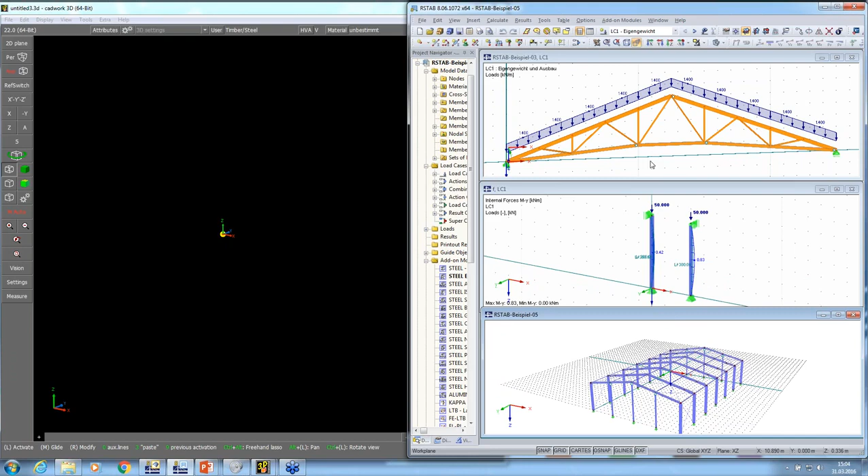So I will start and import something via the COM interface. I have here our framework program RSTAB, and I have three positions open there: there's a steel hall, a truss from wood, and some columns. When you go to cadwork and go to add files, you have a button, RSTAB.COM, that is only available if you have this additional license from us, and you can choose there, go RSTAB.COM, and select which project you want to import.

For this webinar today, we will mainly show the behavior of timber structures. I want to import this wooden truss. Press OK, and cadwork takes connection to RSTAB and imports it there. Here you can see that the properties of the profiles and the material properties are taken over, and you got all that information there. The next part is to import another truss that Christian Levers will model and show you how to model it in cadwork, and that's why I give the word to him right now.

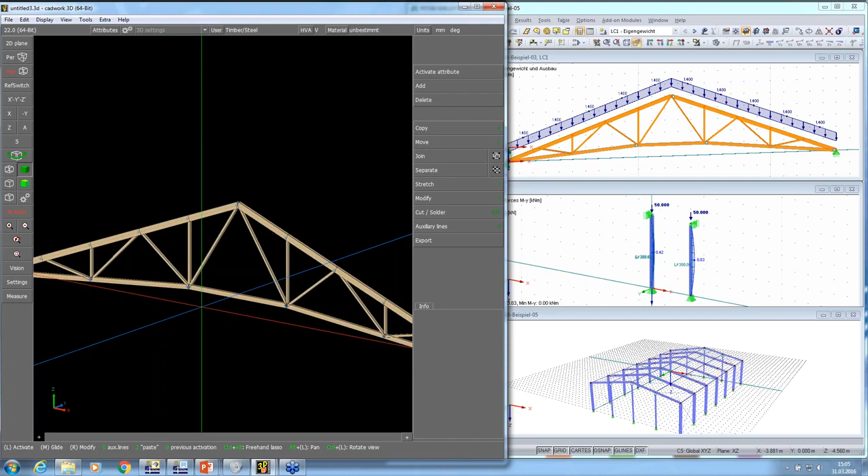So what we will do today is first create a truss, and for this truss I will use the new version Cadwork 23, which has been delivering since a week, and we will deliver this to every client in the next weeks.

So what I will use is not a single beam or a design, but a variant catalog file, or parametric catalog file, and this parametric catalog file includes now a straight truss.

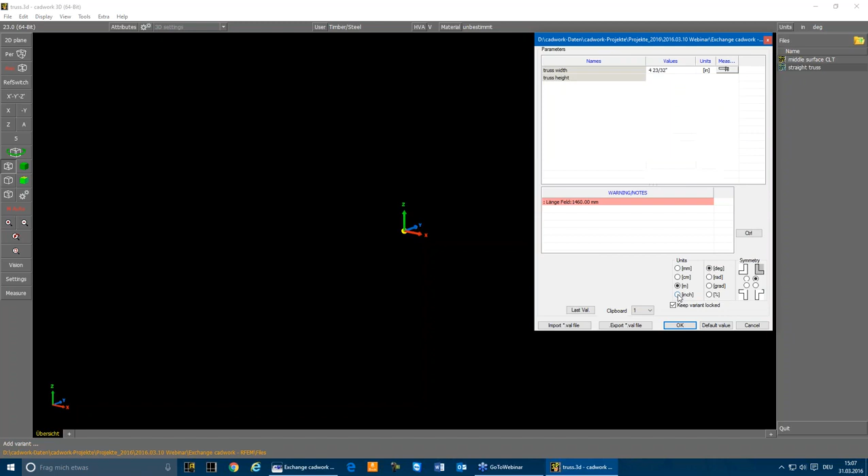You see this one now is in inch. It just doesn't matter, you can switch between the values between millimeters, centimeter, meter, and you can edit inside here. So that means a parametric element.

This is now a truss including all the parts of our beam. When I do a double click on it again, I'm back in the menu and I can change the values. For example, I change the truss width to 6 inch, the overall truss height to 5 feet, and so on.

So I just use different values for my truss, and for the girder let's choose a 10 inch and a 10 inch for the height of the top girder. The width of the side post should be 4 inch, and so on. So that means I can just define the elements.

I will choose a maximum field for the braces of 4 feet, and in this case for our calculation, I don't need this slotted plate, so I will put it to 0. Also the additional space, and also those parts here which will not be used.

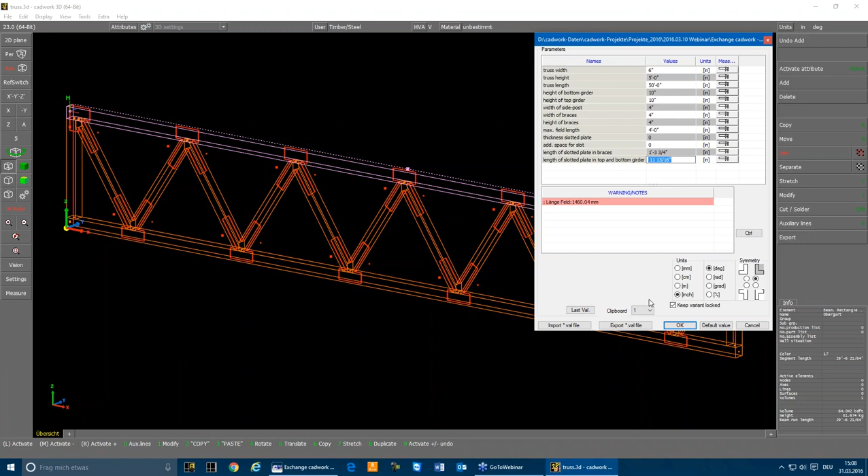So that means with the change of these values, I will be able to define an element like this, a truss like this. So you see it's a kind of parametric design.

So now we also have some information about material and so on. For example, this one now is done in glulam. There are some names inside and some values for the dimension. So you can define all this in the Cadwork variant.

But now, how to get this into RFEM for the calculation, we have several options. The first option is that I will activate all the beams.

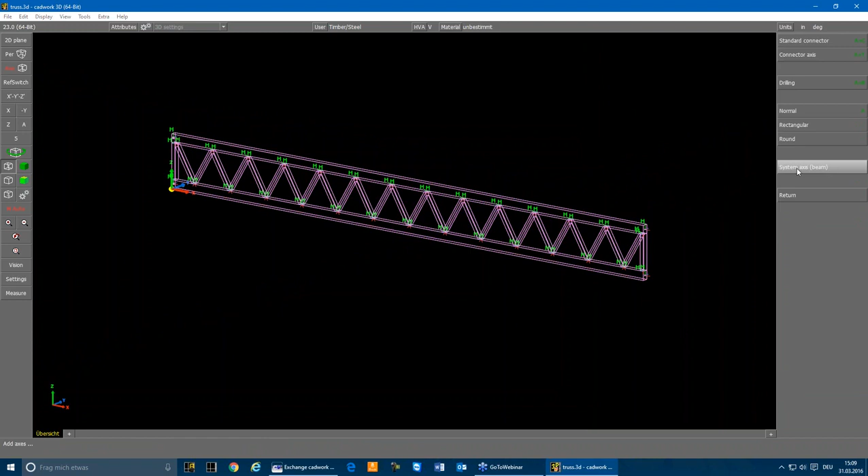Now we'll go to Add Axis and define the system axis for each beam. That means now in the center, gravity center of each beam, there is now an axis, but you see what's missing here is the eccentricities from this point to this point here.

So at this first model, I will just define, or change it, by either moving the axis to the right position using the shortcut command 5 for moving, or 7 for stretching, and I will define a new model which looks like this.

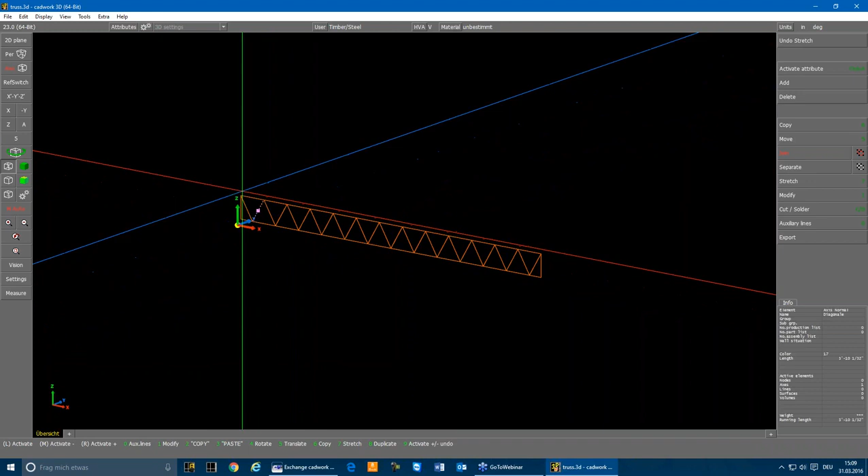So this is now just a quite simple way to define only the system axis, and we can export those axes by Export Files, DXF file, into a 3D DXF file.

I can choose the color, the layer by color, material, or name or group. I will choose it by name, and this one should be called truss.dxf.

So this is the first option to export a design or a structure from Cadwork. So now I will just show another option which is possible, and this is a very, very clever one.

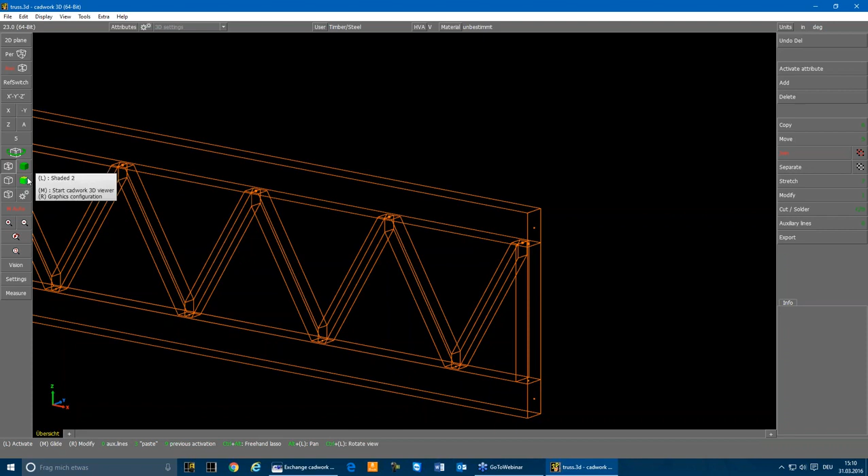This is available since version 23 for every Cadwork user. Here in our design we do have a connecting surface, a connecting surface from this part, so from the braces and the top and bottom girder.

So we do have a touching surface. We don't have to define anything on this touching surface, but what we can do is activate it.

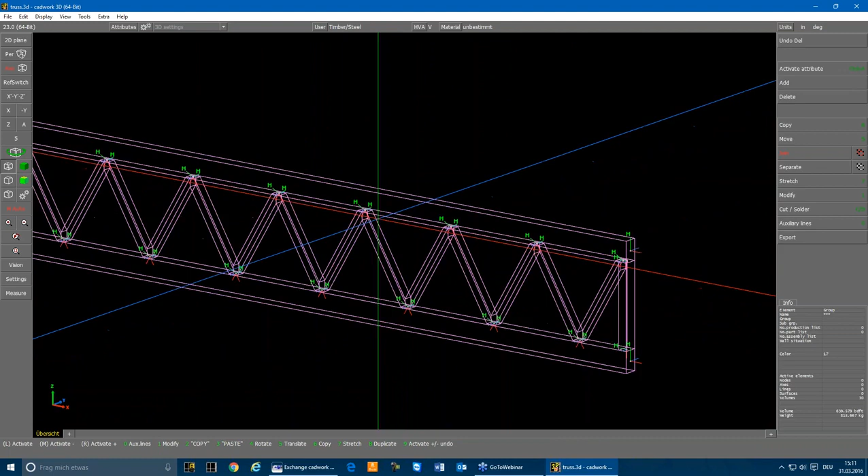And we can go to Export, Module, and just select the point Structural System. So then we have an internal analyzing tool, which gets an automatic connection between the braces and, in this case, the girder.

So that means according to the touching surface, we have this eccentricity filled with a beam or additional element. Then we can save this DSTV file, call it truss.stp, and that means now we have a step file which can be handled in the RFEM program, and Bastian will now show you how to do that.

Okay, thanks, Christian. I will actually split this presentation into two parts.

What I'm going to do now is import this truss beam via DXF and via .stp format, and the design with these trusses I will do with Eurocode 5 with the annex from United Kingdom, British Standard annex. In the second part we're going to do a CLT position, which is a bit more complex, and I will do the design with our pretty new American design modules for some parts.

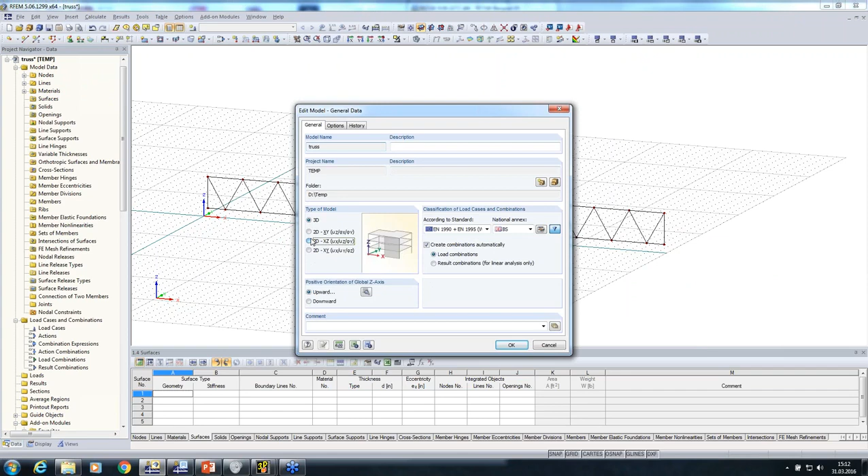Once I've imported it, I just make a plausibility check. I have here the size 50 feet, so that is all correct. As I'm in the XZ area, I'm able to change my model to 2D XZ just to make modeling a little bit easier and not have so many degrees I need to look for.

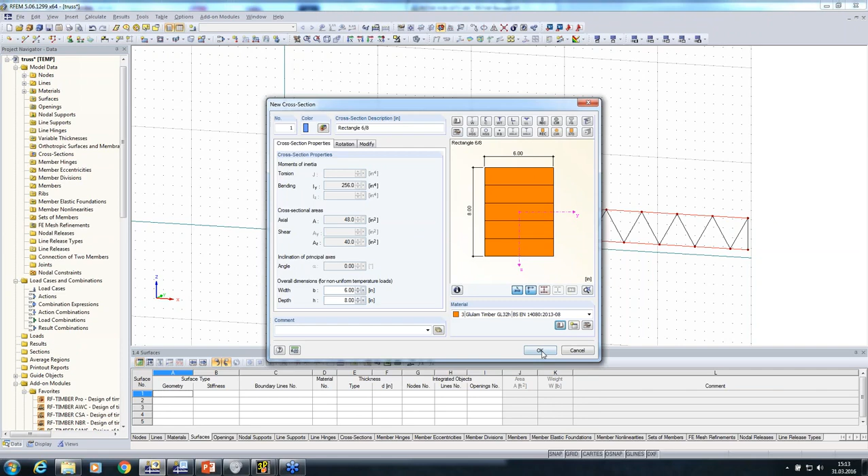Then I changed the top and the bottom girder into a profile. Let's say we could try something else with a rectangle, 6 by 8 inch, and as a material I would choose some glulam, let's say a pretty good material grade, GL32 for top and bottom girder. Okay, and then I have that created.

I will also create a set of members to make an easier load input later on. This is now a continuous beam, it's not cut in between the braces, which I need to do as well. So now it's done here.

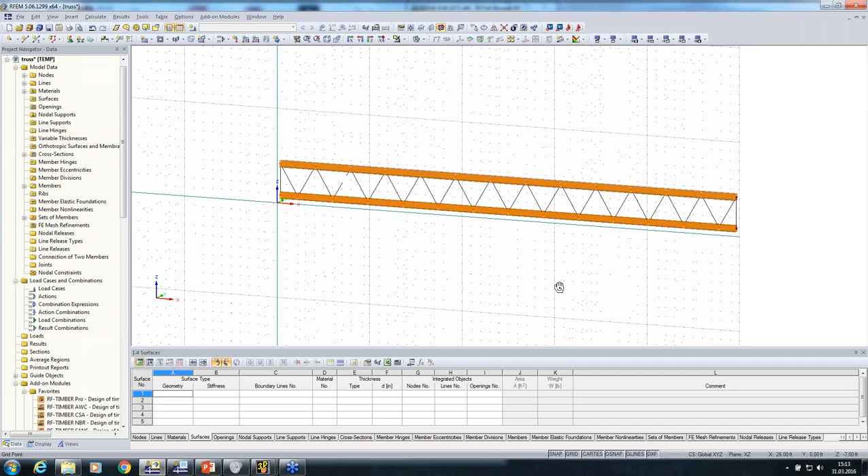And then I change the braces into a truss beam via the same way. There I would use a profile rectangle, let's say 5.5 by 5.5 inch, and maybe not such a high grade material, only GL28, just to have some difference. And make, as I said, a truss beam here, which is just nothing else than a beam with moment hinges on both ends.

Okay, and then this truss is created. Now I need to define some supports, so one that's not movable in all directions, and here I would create a support movable in the X direction.

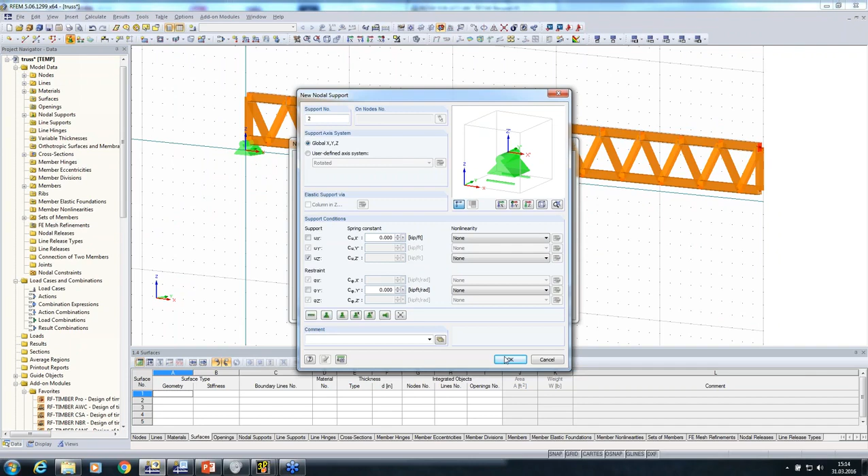As a load, I would define self-weight with characteristic value, and on top I would define some setup of minus 0.5 kilopound per foot, one more time for the set of member.

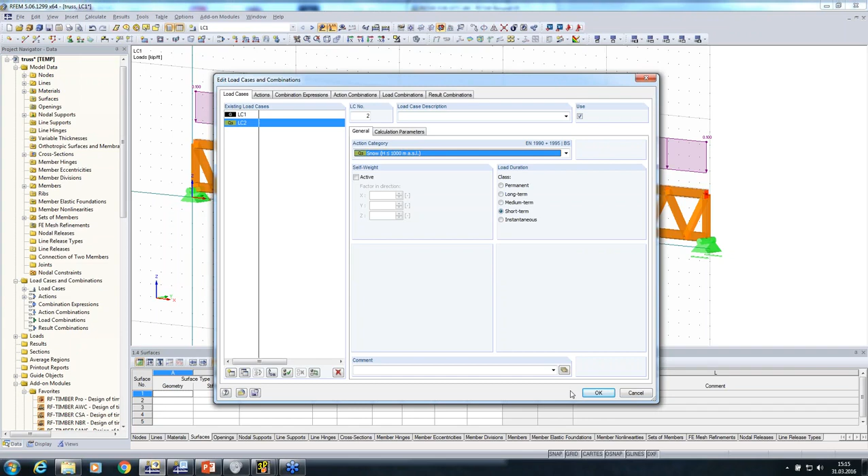Okay, and a second load case for the snow, just to get some combination. You see now that I took the automatic combination with Eurocode 5, I already have a classification of the loads and don't need to take care about this anymore. As snow load, I would use minus 0.22 kilopound per foot. So the loading is ready, and I would take a look at the combination.

As an action, I would define ultimate limit state according to first order theory. I'm not taking care about serviceability right now, but this is also possible here.

In the design process, I will just show the modules and not get too deep into their behavior. There are special webinars for each module we are showing today - there's a webinar for Timber Pro, one for Laminate, and for joints as well. That will be touched there much more detailed than I could do it now.

Here we have design modules for timber beams for Eurocode and Switzerland with, I would say, nearly all national annexes I can estimate. American standard we have, Canadian standard, South Africa, and Brazil we have as well.

Okay, so in the first step I would do the beam design with Timber Pro. Choose there also the national annex from British standard, ultimate limit state. As I said, I don't take care about serviceability and fire resistance. I will say a word about cross-sectional area reduction on the bigger module in the American standard design module later on.

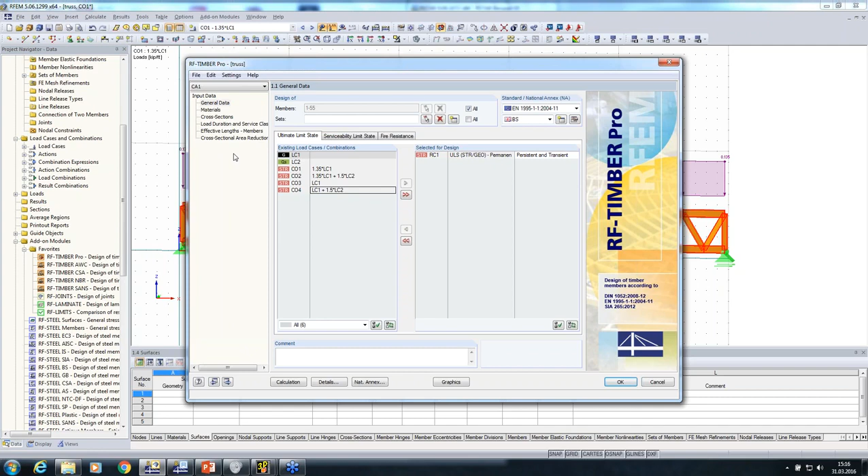I could uncheck the stability design as lateral torsional buckling - I'm not interested right now, and also not buckling out of the narrow side.

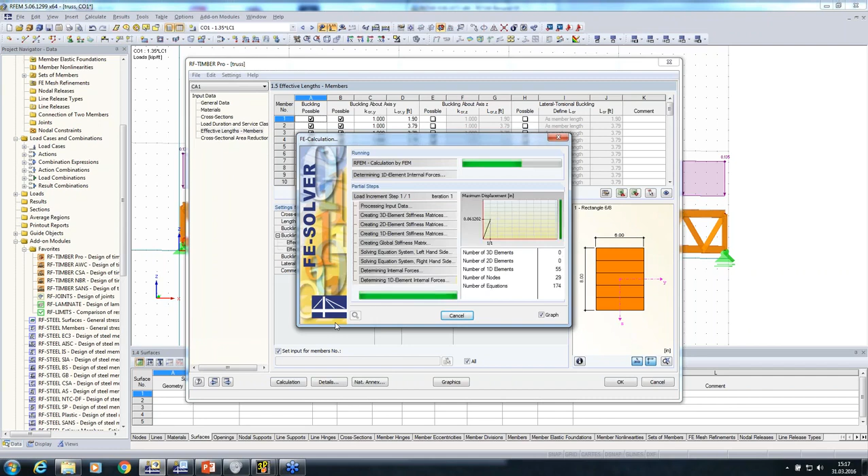Calculate the truss and we'll receive a loading. So it's pretty low loaded with 40%. That's pretty low, but we must also consider the connections in between, which will narrow the profile one more time. So to have a loading of 60-70% is pretty common for this kind of truss.

And now I would go to joints, but I forgot one thing - joints is able to create stiffnesses itself, and therefore I need to change that truss here, the beams, one more time from truss to beam, and make a hinge, a moment hinge, on the end.

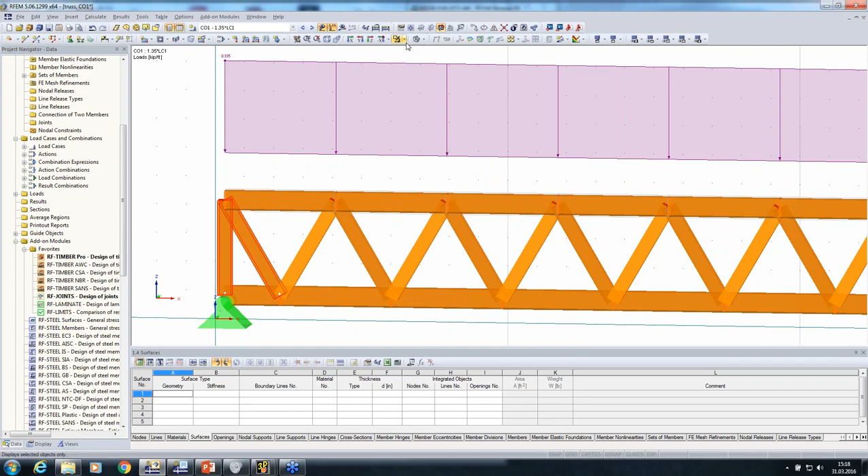Just to show you the inner forces, because that is pretty impressive for this structure. If you look at the structure right now, it's like we all learned in school. We have the moment where you have some kind of support here, the negative moment, and on the end the moment is everywhere zero.

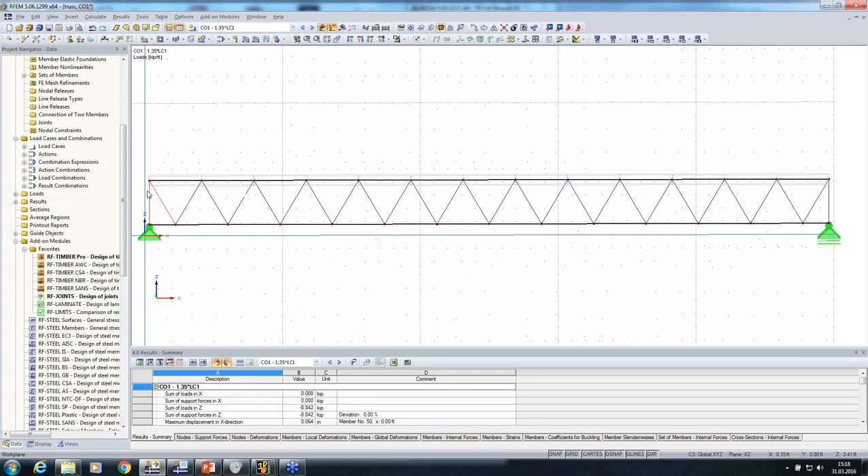And now when you change that, regarding some stiffness that is assigned here due to the connection, I would beam and moment hinge and go to the module joints. So the module joints is also split into two modules, or there's a whole bunch of modules inside.

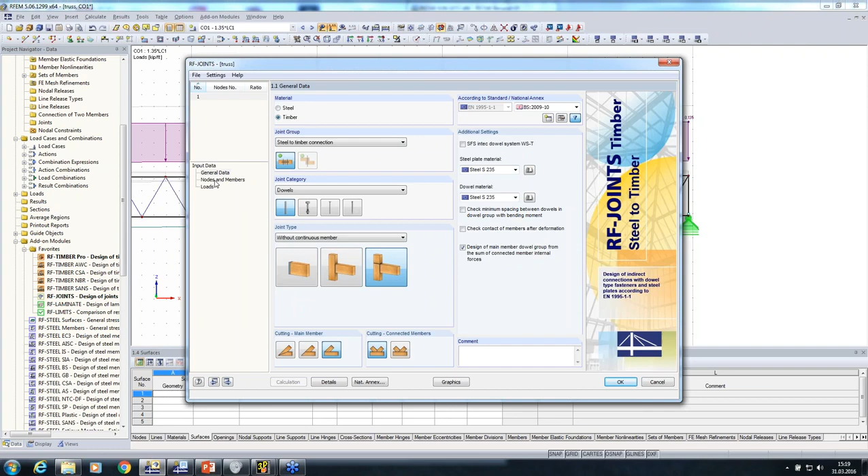We are today only looking at timber, but it's also possible to design steel connections in there. You have also a lot of annexes. I would just design the end with this cutting, and use this node and this node.

So it already recognized, okay, there's some connection possible, and I can take that here. The main member I want to have on top right now. That's what I'm changing, so I change that to main member and this to connected. Yes, yes. So then the connection is set.

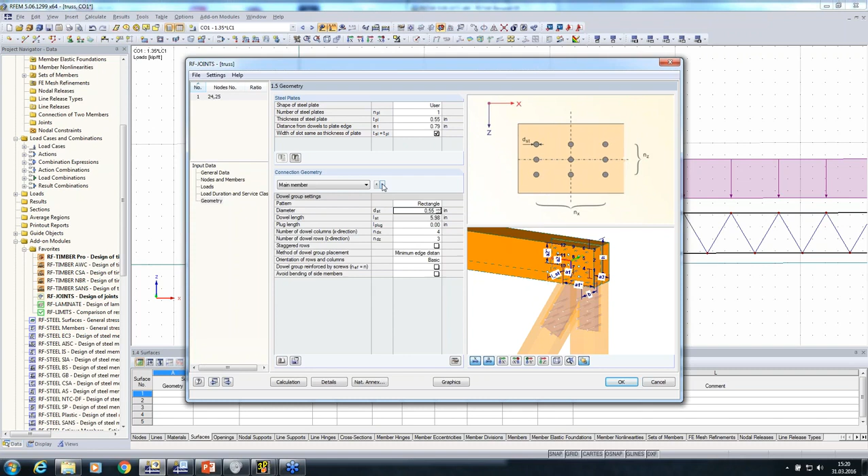I just define some load to it and look for the geometry. I will not change too much here, just to have some more common thickness of the steel plate. And I could change that to 0.55 and make pretty much dowels here, as I have a very high tension force here that I need to assign to it.

At 0.55, I put 12 dowels in longitudinal direction on this side and also 12 on the other, at 0.55. Okay, that's a lot of dowels right now. In practice it is probably more common to use a user-defined distance here and to make a bigger surface you can attach with the dowels. But as I said, for now, that should be enough.

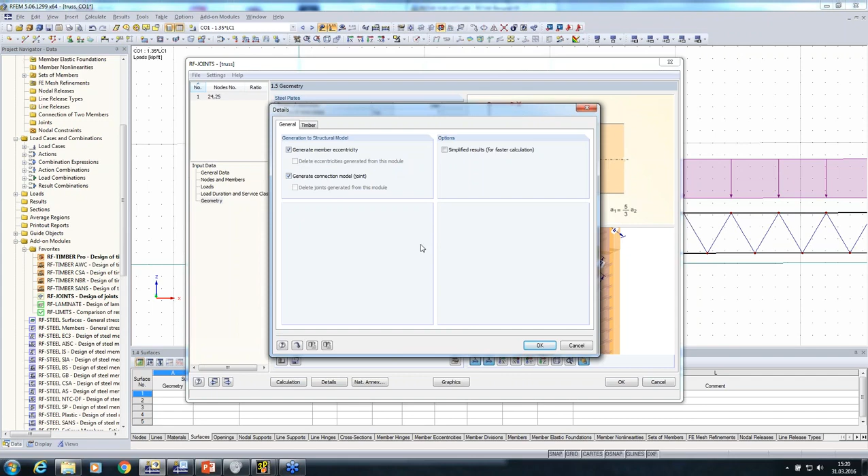Now I can tell the module to export the stiffness to RFEM and make a design with an iterative design process by changing the stiffness outside and calculating the forces again inside. So I got some connection problems here, some geometrical restrictions, but the loading of the dowels itself is not so high. That's all okay, but what it did during the calculation is just what I said.

It made its own eccentricity, changed it here, and if you look at the inner forces right now, you see I have now also some negative moment here at the end where it was zero before, and that's because of the more stiffness I assign with the dowels.

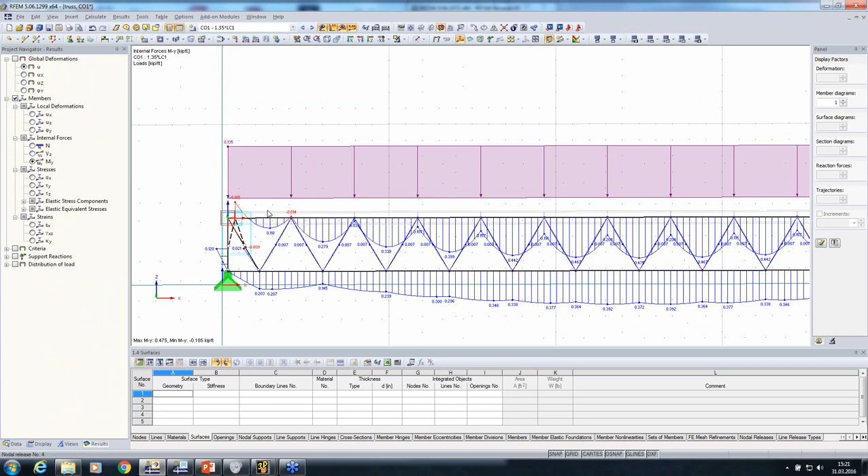Okay, that should be it, and now I'm importing the geometry from Christian via the .stp interface that already contains the eccentricity, so I don't need to take care about that there anymore.

When you do the .stp import, you have an option here to use a conversion file for materials and cross sections. Very useful with any other program you are working with, because you can combine the materials and names from the other software to ours. Every profile and material has a little bit different name in another software, just because a CAD program must look for other things than we must look at in the static design.

So right here I changed already a few things. What we could try out is just delete the glulam that Christian defined for the truss, and then see that it's not working, and then change it afterwards. So I save it.

Go inside here and choose that truss from Christian. I would not do the automatic combination right now. I think you've seen that all. And when I import it now, you see, okay, it's blue and the material is not found, as I deleted it before. So we're going to do that one more time.

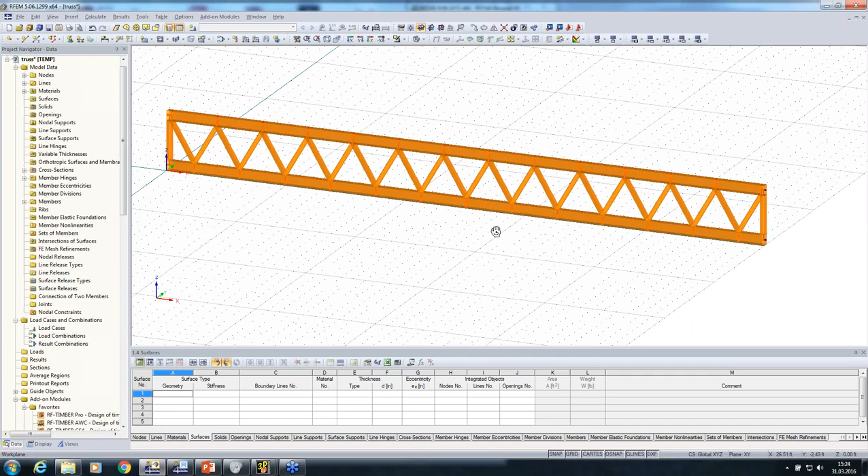Okay, save. And now if I do it, it should be imported with the material properties. And you see, okay, that's working now, the material is found. And now if you look for the model, you see it's also in 3D, so that's what I can change directly right now. Make it a 2D position and work with it in this area.

One thing I need to say, this eccentricity here, the moment hinge should be downwards, it's upwards. Change it via right click and say member, reverse member orientation.

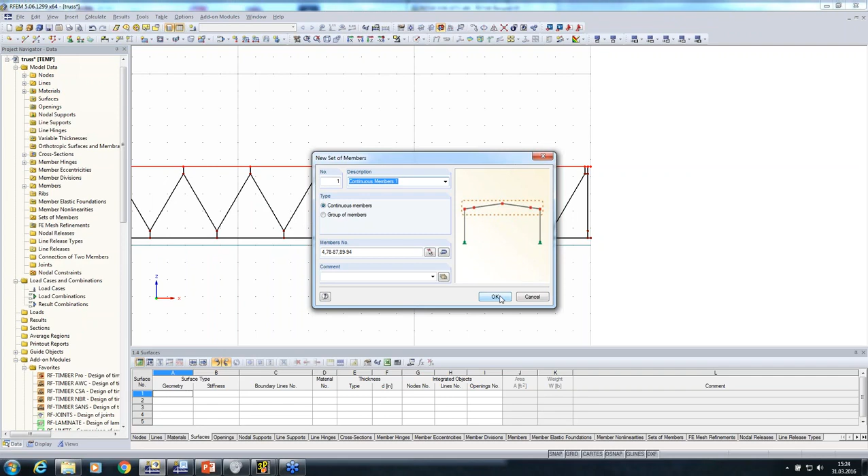Just to give you an estimation of the changes of the inner forces, I load it, create also a set of member and a support similar to the one I just defined on the other structure. On the right side I make it movable in X direction. And now I load it - set of member, same load as before.

And when you calculate it now, that's just what I wanted to show you, that you have then also negative - or it's not negative because the member orientation is changed - but you got a positive moment here now on the top, which is pretty similar to the one we just had.

Okay, that will be the first part. Now Christian is going to show you how to model a more complex building, and I'm going to import it afterwards and design it according to American standard.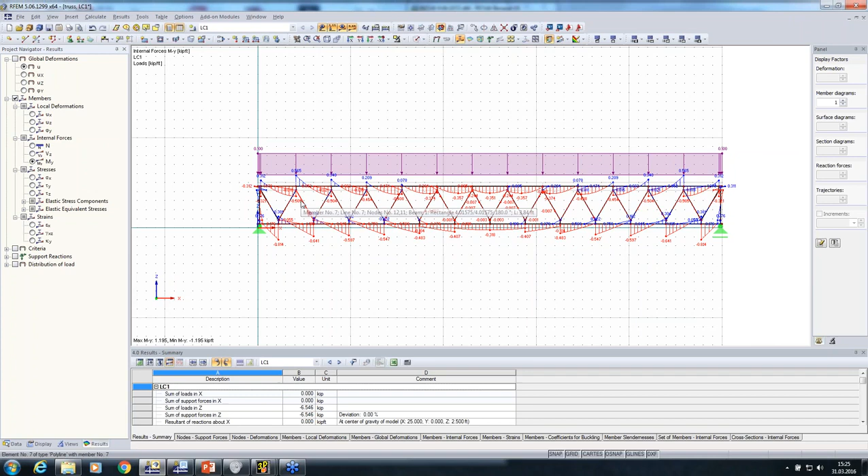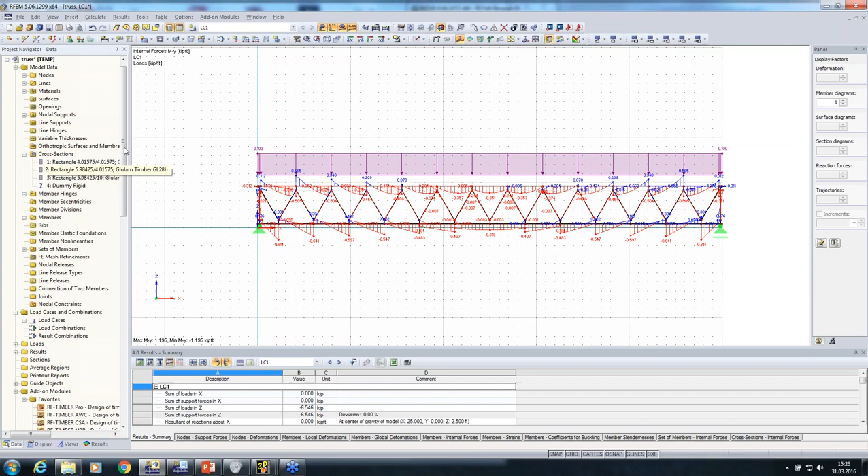Bastian, do you want to show to import this one into cadwork again? Yes, thanks, I forgot that. Very good, let's assume we need to change something. I forgot it on Tuesday as well on the German webinar. Okay, very good, so let's say we change the - what do we change? We change the braces to maybe also a more common value, let's say 5 by 5.

Say okay, and now that we need to increase the size, we export it to cadwork via this button. There's also a conversion table which works the same way as I just told, and then I call it 1, 2, 3.

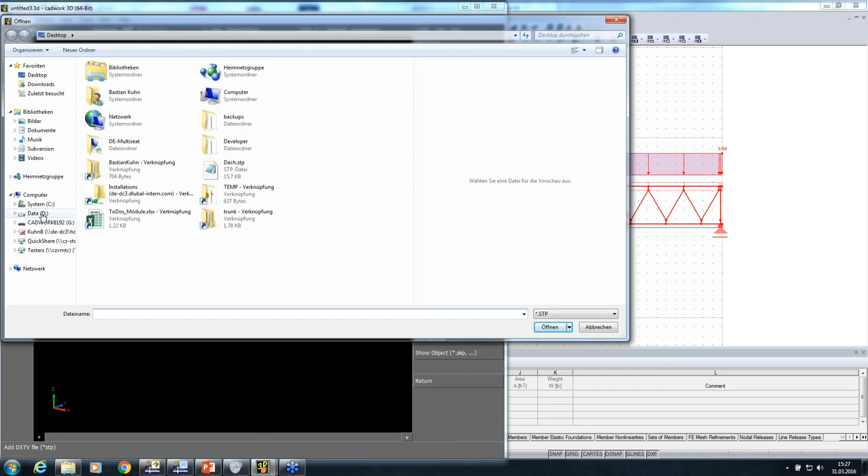Say okay, and then when I go inside cadwork, add files, DSTV - where was it? Webinar, cadwork, today, 1, 2, 3.

So, if you look right now, you got the properties of the beam assigned, and also the size of the profiles is changed, and also the material properties are imported to cadwork.

So the big advantage - maybe one thing, go to modify, then we could see the material. So you see that now with this conversion table, we got the right material back into cadwork. That's correct, yeah. I did not change it to inch, so, but in cadwork - no, that's not a problem, yeah, it's just a thing in units. So it's everything okay. Exactly, yeah.

Okay, thanks. So I give the word to Christian. Okay, so from my side, now I will do a little bigger model that is now a complete house containing 3 different parts.

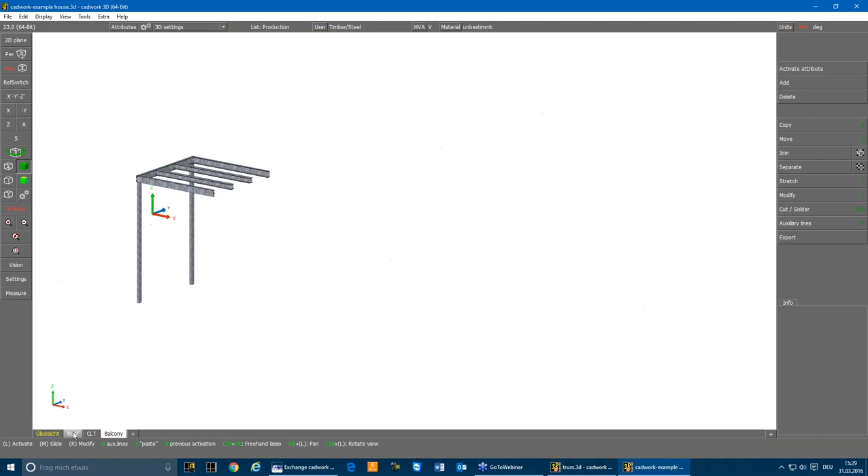So the one is the roof. Then we do have the CLT elements for walls and floors. And in this case, a steel-shaped balcony. We will just define 3 different outputs here. So first of all, we will take a look at the roof.

Also in the roof we have our beams, and we do have a hard and soft cut here with the purlins and the rafter. That means we do have a connection surface which is here horizontally and here vertically, so it means we have 2 connecting points. This will be one point we have to look out for later on if we define that.

So for the support, we can either do this now later on in RFEM, but also we can do this already in cadwork. So as Bastian imported the DSTV file into cadwork, this was including also some nodes, and the node information is also including the support information. So in this case here, I will just use the catalog file I prepared - this is support, not movable in this case. And you see it looks like this. The only important thing is actually only the node on the top, this one.

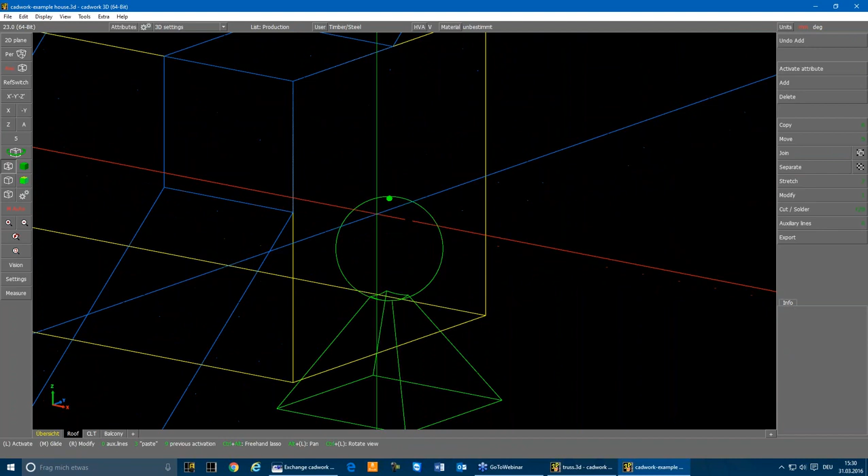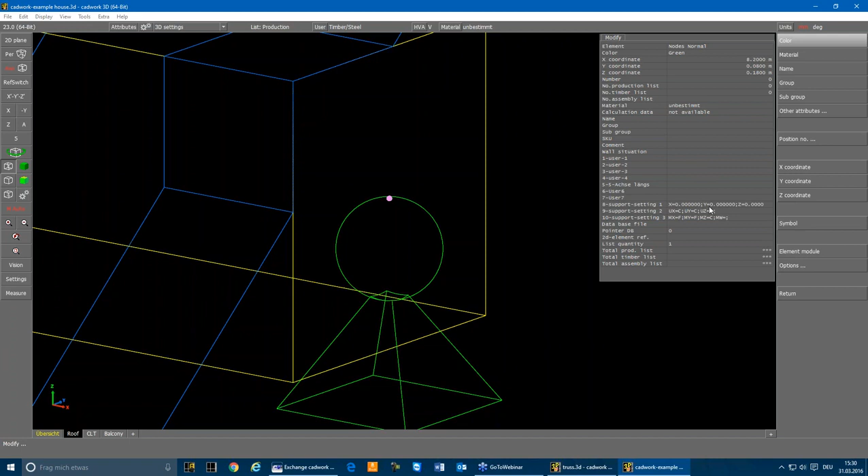When I go to modify, you see that this is a normal node, but we do have the support information in user 8, 9, and 10. So this is just what is possible in cadwork, that you define the support settings for RStab or RFEM directly in here. That means this one here is just for visibility reasons - the important thing is the node.

So we can move this, for example, in x-axis to that point with 6 for copy in x-axis. We can copy it to this point as well, or we can copy it either by 12 times in x-axis to that point. So it means that here we can easily define all the supports.

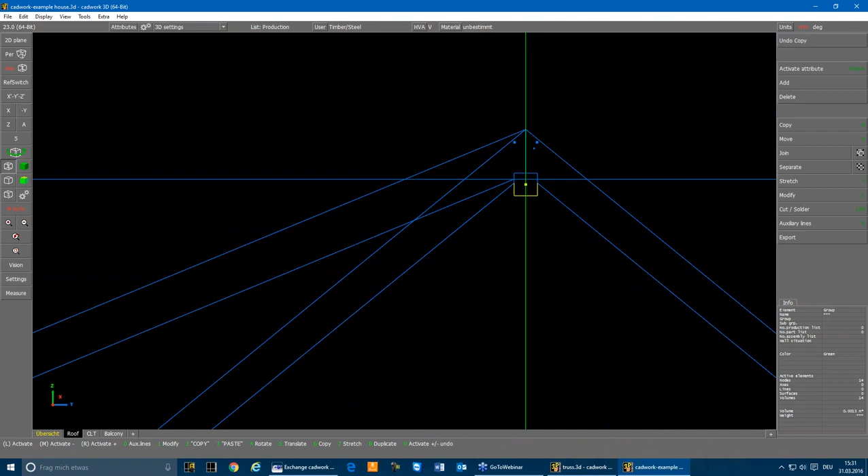Also, we can copy this one, all of them, by 6 for copy, S for symmetry in y-axis through the center of the ridge point, and we have it on that side as well. So that means it's very easy to handle all the supports, and it will take you less work than later on in RFEM to define it.

So now we will put it from here to here to have a support in the ridge beam as well. Copy it to the other side to the midpoint of this ridge beam, and we do that with all the supports we need. By switching off the auxiliary elements, we now have a model which looks like this, including the rafter with, for example, material spruce, and the purlins and posts with the material glulam as well, like we had before.

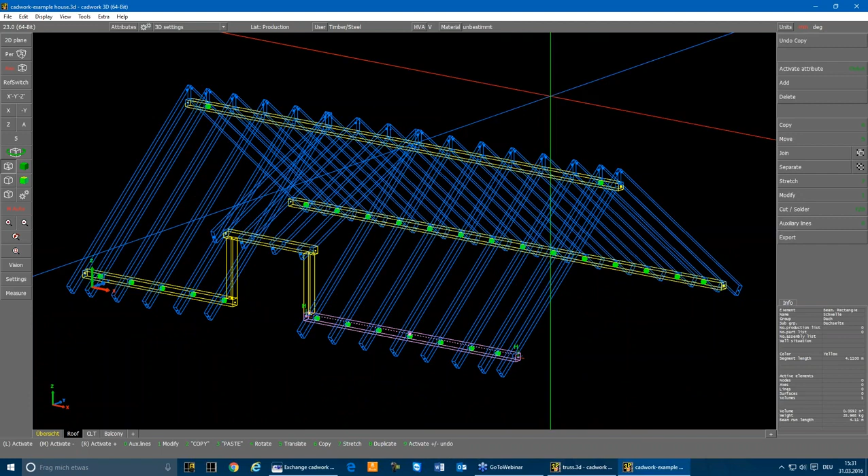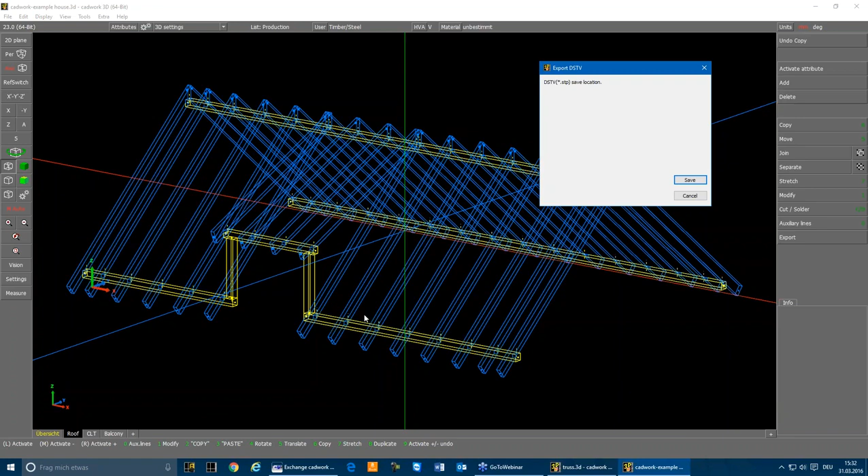So when we now activate all the parts and go to export module structural system, the elements are defined, and the system finds that there are 2 touching surfaces at one point, the horizontal and vertical one, and now we have to choose which one is preferred. We will take the vertical connection as preferred, and then on each touching point, we have this additional element, the eccentricity here from the purlin to the rafter.

So we will save this now as a roof, and it will be saved as a step file. So this was part 1.

Part 2 will be the CLT parts, and the problem with CLT parts is that we can't work like a beam on this one. We need an additional element for the laminated walls and the floors, and this is a middle surface we should work with.

To define this, we just created a small variant tool again, which is in Add, Variants, current folder in this case. We call this one Middle Surface CLT. Anybody who wants this file, just write a mail to info@cadwork.de or to their connected cadwork reseller, and we will send the variant file to everybody.

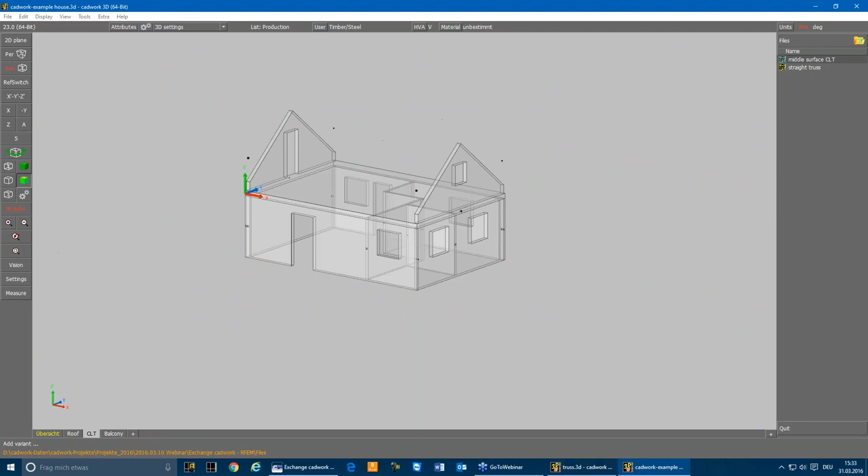So this is just a small variant that, when I define all the parts, creates surfaces right in the middle of each element, using Control A and M. So you see we now have a rough model of these parts. We can go to cut and, for example, cut them to our surfaces, or we can just stretch all the surfaces to the right size, stretching it in the Z-axis to this point, for example. We can stretch the corner connections, stretch it to this point, and so on.

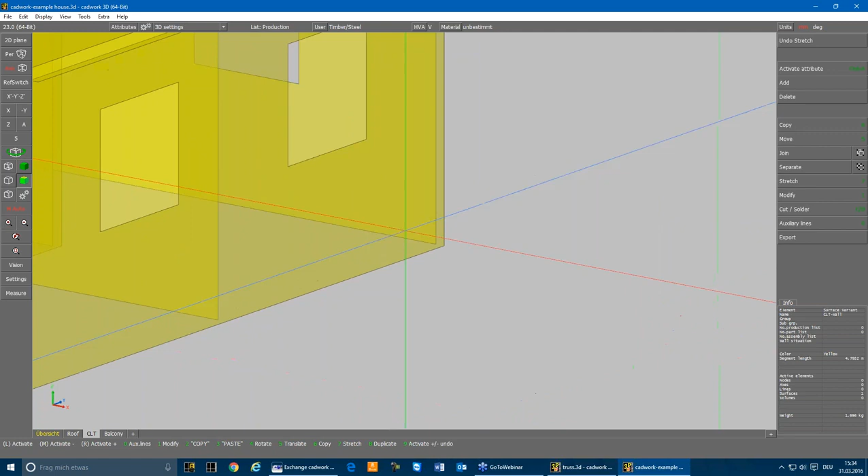That makes it quite easy again to find a model, nearly the same as working on the DXF model in this case, but it's in 3 dimensions and working with surfaces. So when we define it like this, and we stretch those 2 parts as well in the Z-axis to this point, we easily get all the connections.

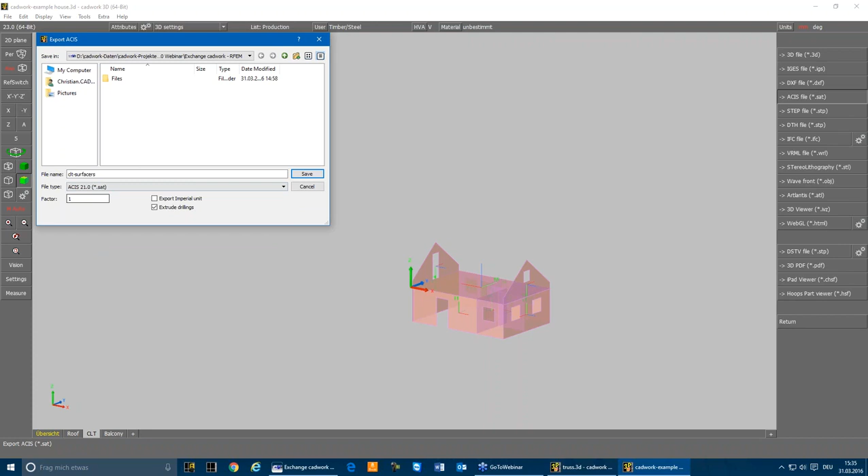So this one can now be exported as a file, an ACIS file or ACIS SAT file. We'll call this one CLT surfaces, and choose a very high SAT file type. In cadwork it's possible up to version 26, but here in this webinar we will use version 21 of the ACIS file. Factor should be 1, and I will just save it.

So that means we saved all the information about the surfaces into one file. The third export would be the balcony, but here we will not define the balcony with this automatic structural system; we will just export the information about the profiles.

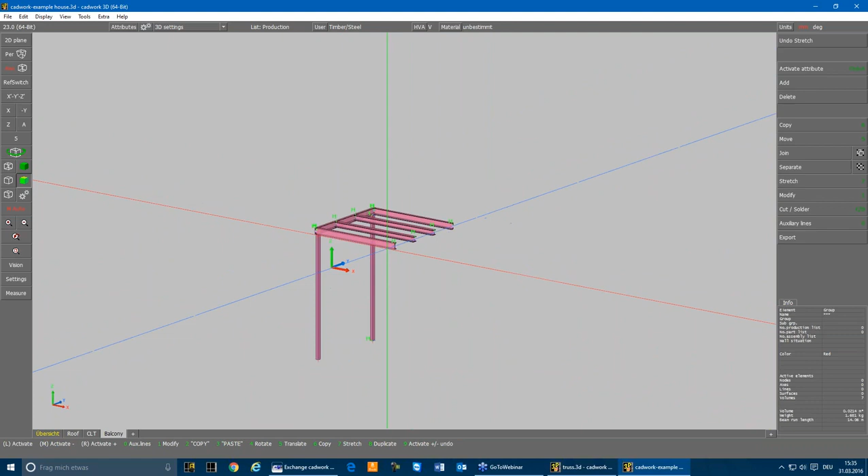In this case it's a steel profile, steel shape C5x9, and we will just export all those parts by using the export file DSTV, just to show you the differences between this one and the structural export we did for the roof or for the truss. So I will choose it and name this balcony.

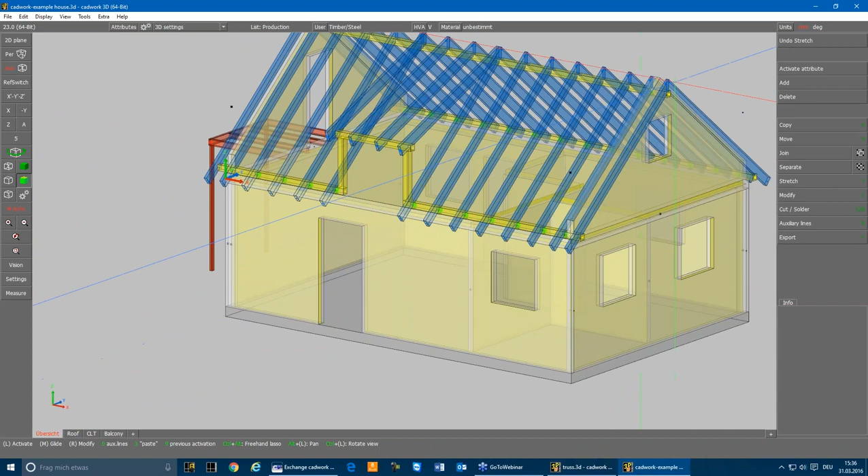So that means from this building with 3 different settings - the roof, the CLT and the balcony - we now have 3 different exports, and Bastian will show us how to combine them into one single model to work further with this.

All right, thanks Christian. That's what I'm going to do. I will start by importing the roof and just design this roof on its own, because that's also possible right here. So I take this position, roof, import it, and now I want to design according to American standard and also create the combinations automatically. I go in here and have the structure ready.

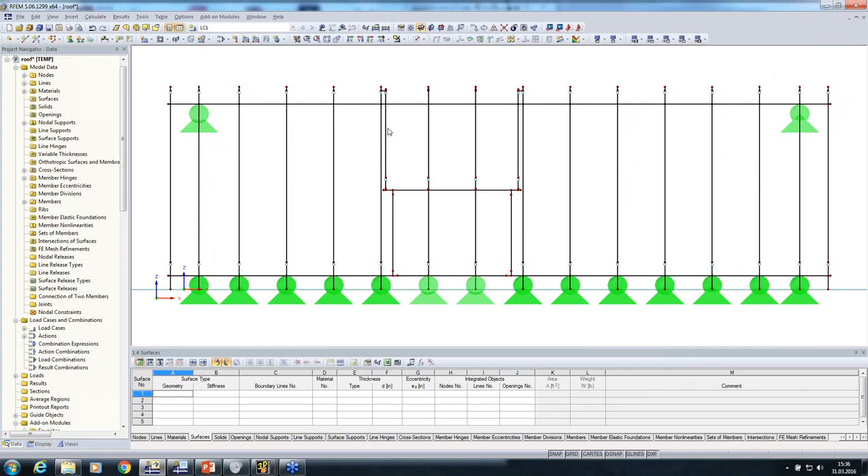So you see I have the nodal supports and all the properties assigned, and also, if I change to the static system, the eccentricity from the purlin to the rafter is assigned correctly. Just to show you that it's possible to directly start designing with it, I'm going to assign the self-weight before I put the whole model together.

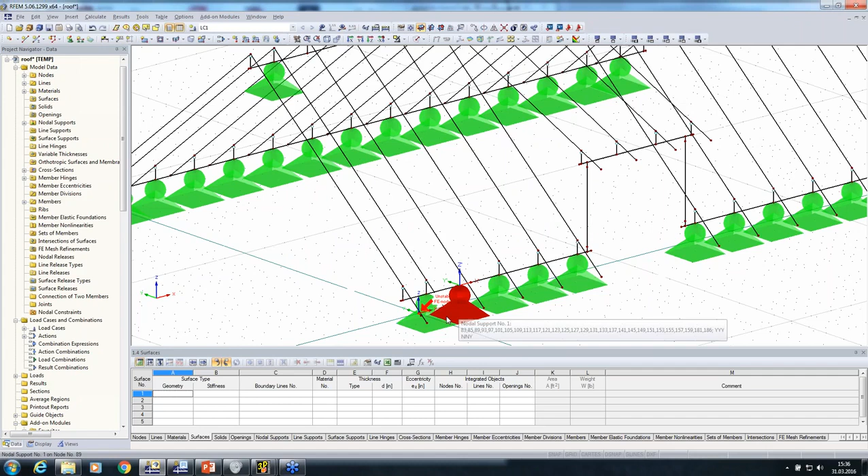Just delete that little beam there. Now if you calculate it, there's not much load assigned right now, but you see, hold on, that's probably my fault because I changed that little node there. Yeah, that's the one I didn't get correctly.

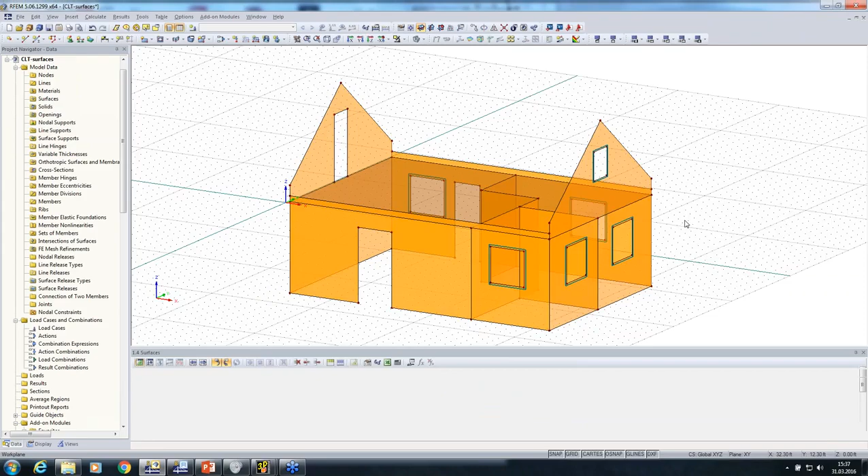So I see, okay, not much deflection, but it's possible to start designing with it. Now I want to import also the surfaces, the CLT panels, and that's via this additional module, ACIS, standard ACIS text format. Import the model from Christian and also combine it automatically.

So I have it here and I don't need to take care about the eccentricities anymore, as Christian did that for me. Then I can directly start defining the line supports underneath it. It's possible to have a concrete floor underneath and design that in our concrete modules, but we skip that right now. In a timber construction, it's very important to have a moment-free connection on the edges.

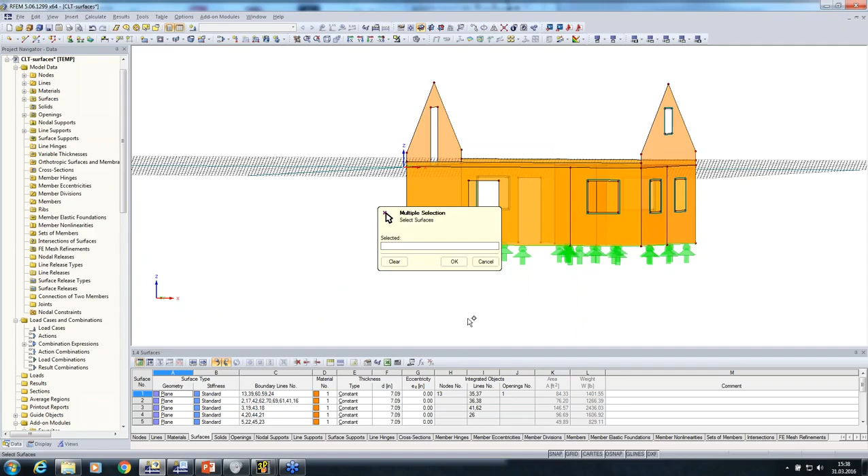So right now it is connected stiff for moment, which isn't correct. I'm going to fix that via Model Data, Line Hinges, graphically, using the moment rotational release right now. We have another webinar where the laminate module is explained in much more detail, with information about how to calculate slip and so on. Right now this would be too much info.

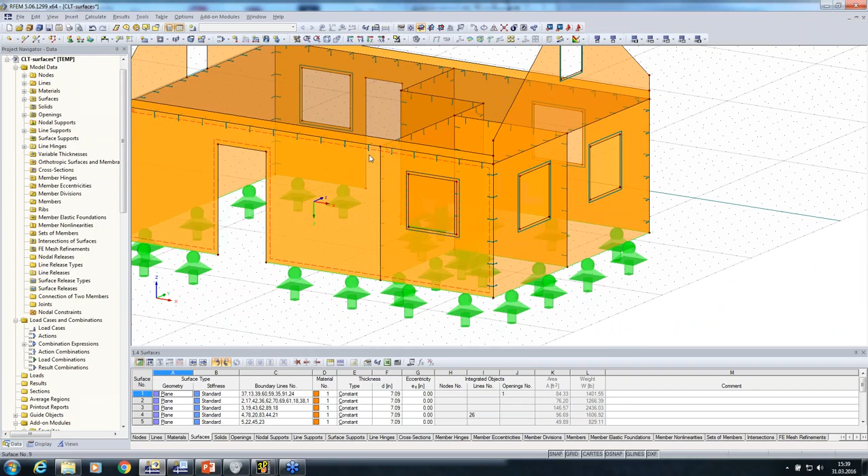So I take these and the floor, and now I have the hinges assigned. Let's assume it goes continuous from the bottom to the ridge right here, and I do the same here as well. One thing I notice right now is that it's not cut - you see this node is not integrated into this line. I'm going to fix that via this command, and when I go on the line right now here, you see that this is working.

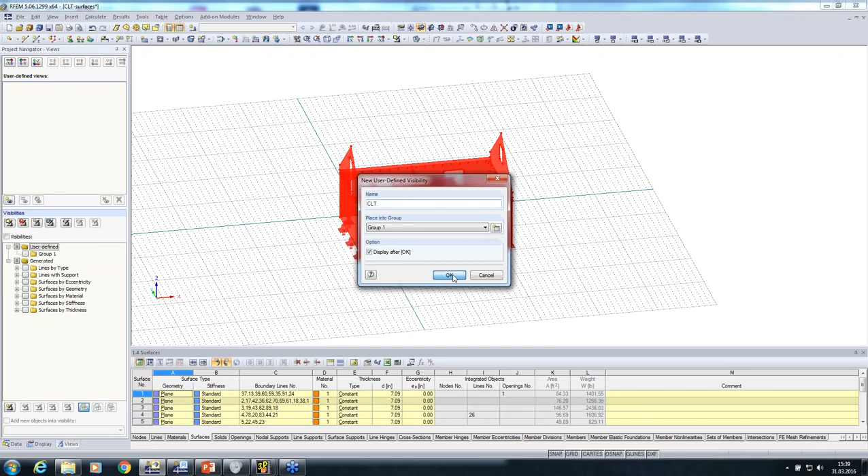Now when you combine one model with another, or put them together into one model, it's helpful to work with views there - that's what I want to do, to help define load situations and so on. So the first view will be CLT. I have that right here. Now I'm going to import the balcony.

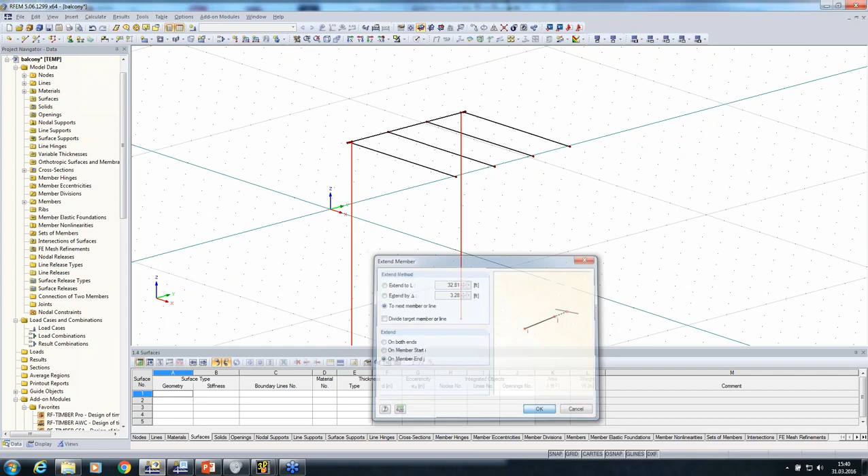And you see that we did not take care about the eccentricity here, but I can also do that easily in this module via Member, Extend Member, and then put it to the next member, and now it's there. Connected, and I put also some support underneath it, and via Control C I put it to that other model. Say okay, and then I create also a view that I will call balcony, so now I can just switch them on and off as I need it.

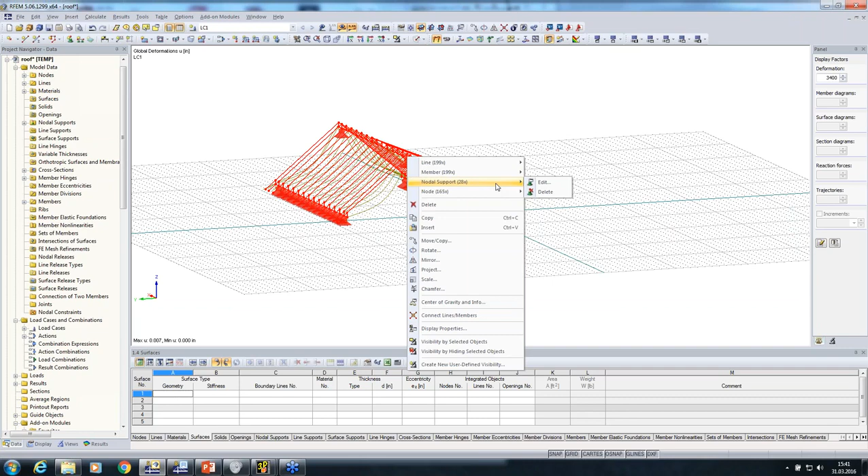And the last step would be to import the roof to that. Before I do that, I'm going to delete the supports - all supports - because I'm calculating with a 3D model. Nodal supports, delete, yes. And then also Control C, and tuck, tuck. And now I have that inside. It is now not directly integrated.

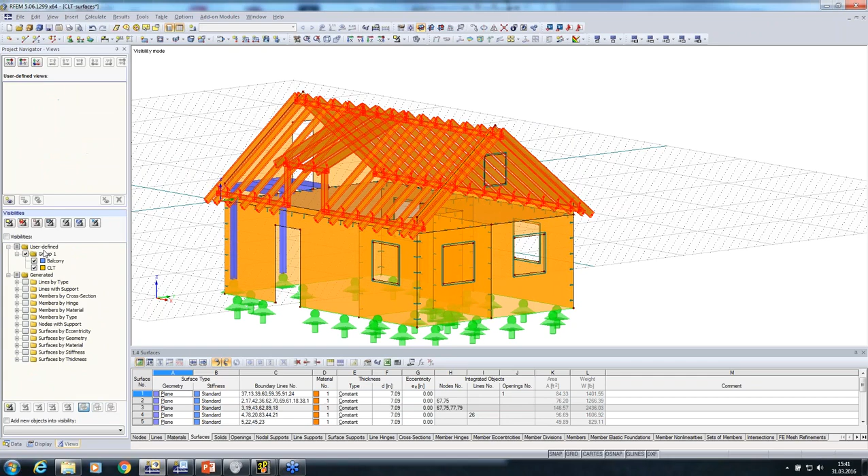One more time, I forgot to create a visibility roof - most important for that. It's not connected right now. I need to do that with connect lines on this position. So let's have a look if it all worked. That's a good hint if it's integrated into the ridge right here. That works, looks all good.

The panels themselves are now still some ordinary wood, but I want CLT panels from it. That's done via the module Laminate, and I will choose the American standard there, and I want to call the design according to Load and Resistance Factor Design. I forgot to define loads, so that's important - I need to do that.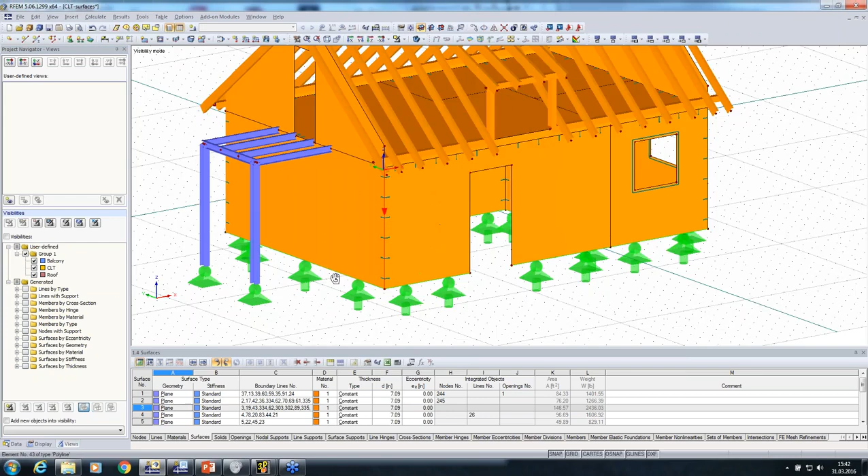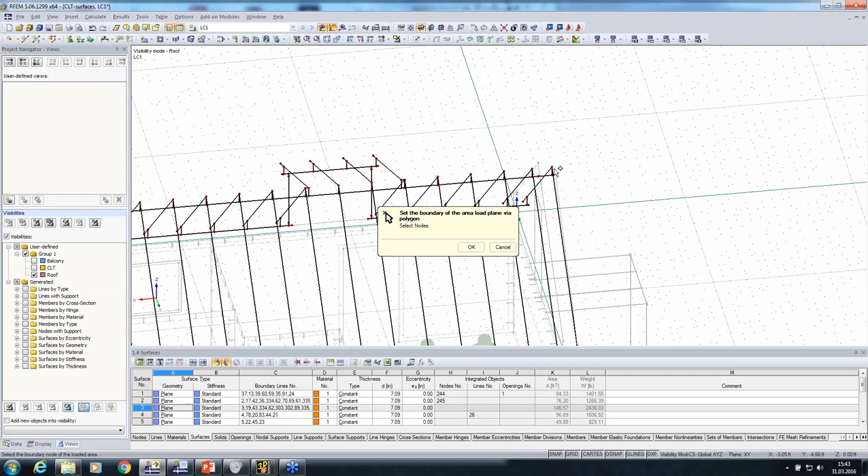And I'm just putting load on top of the roof. That's why I'm switching off all the other views, and I'm creating a self-weight via Generate Loads via Plane, with, let's say minus - what did I write down - minus 0.2 pound per square foot, and I connect, I will choose this node here, and this one, and this one.

Okay, so that load is assigned but in the wrong direction. So that makes more sense, yeah.

Okay, the other side of the roof I will leave out right now, and I will create now the snow load on top. It's also, as I choose the combination before, assigned to the correct load duration class.

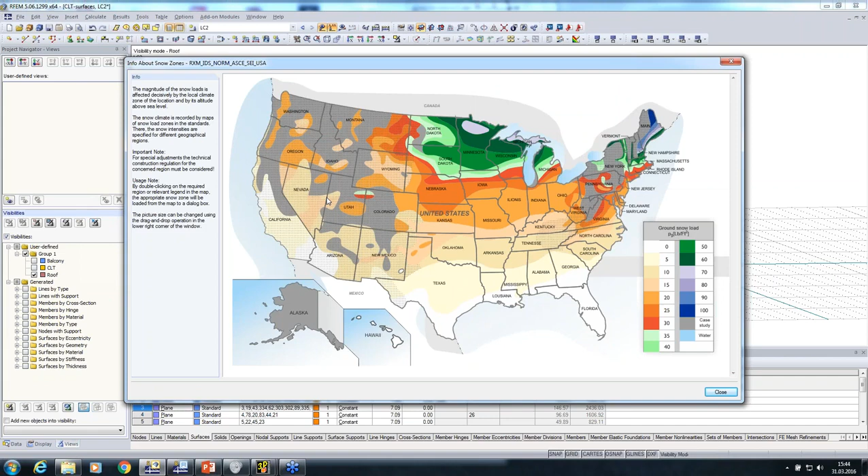I can change it here as well and go tools, generate loads, snow load, duopitch roof, and American standard. I have also a mask here to choose the snow zone, the correct one I want to use, or I can choose it from some column I have.

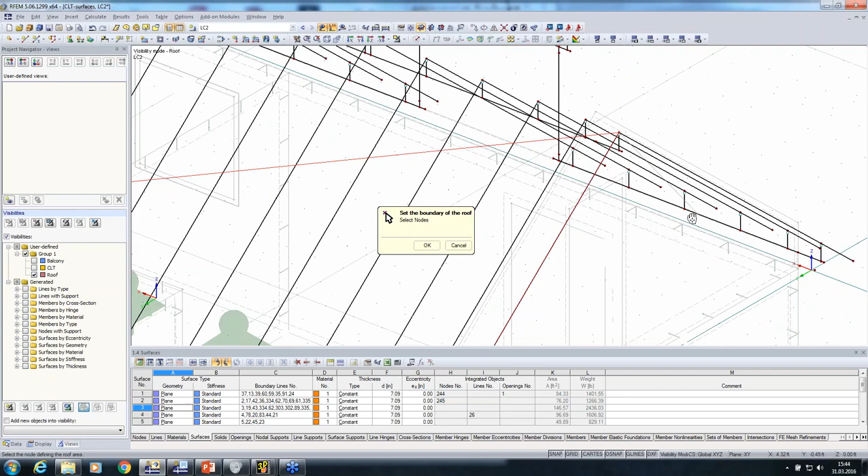Now I choose the roof geometry. So this one, this, and this. Now you see it's not a really big model, but already here the views really make sense, because if I did not do it, I could easily take the wrong node from the CLT position, and that would just have screwed me up. That's why it really makes sense here.

Say okay, and I leave the other wind load cases out. Say also okay, and now I have the snow load assigned. If I want to have a more detailed look, I can display that load separately and have a look how it's behaving.

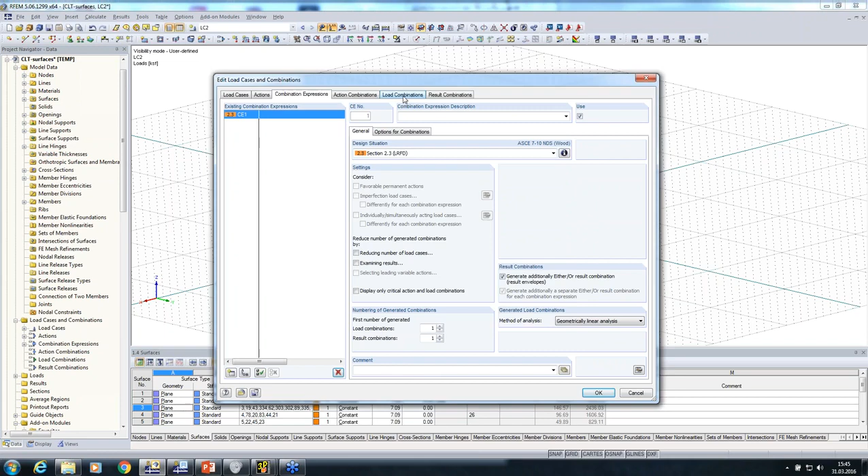So now I go into the combination topic, load combinations, and as I said, I wanted to calculate according to load resistance factor design. It's also possible to calculate with allowable strengths, but we leave that out right now. And I calculate once again also to first order theory. These are the combinations I will get out from these two load cases.

Say okay, and now I can go one more time to the laminate module, choose the American standard, and say okay, I choose the combination for load and resistance factor design, so I use that, and choose also the combination to that, and all surfaces.

So this one, and for the walls we're going to make a pretty or more slim plate, because there is not much loading I will expect from that. Say okay, now I'm choosing the walls, therefore I will switch off the roof and maybe the balcony, does not really matter, and now just choose all surfaces, and the floor I want to have another setup.

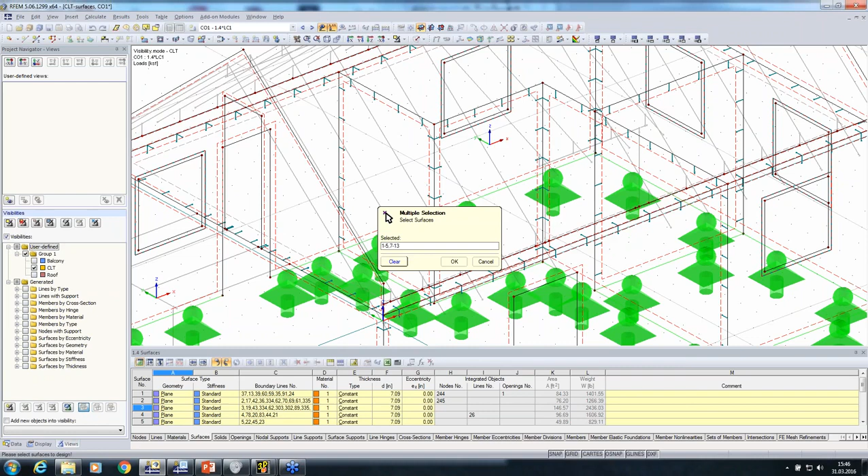I can create a new composition right here, which will be a little bit bigger. Let's say this one. And now it's already assigned to the surfaces. They have now this property of the CLT panel.

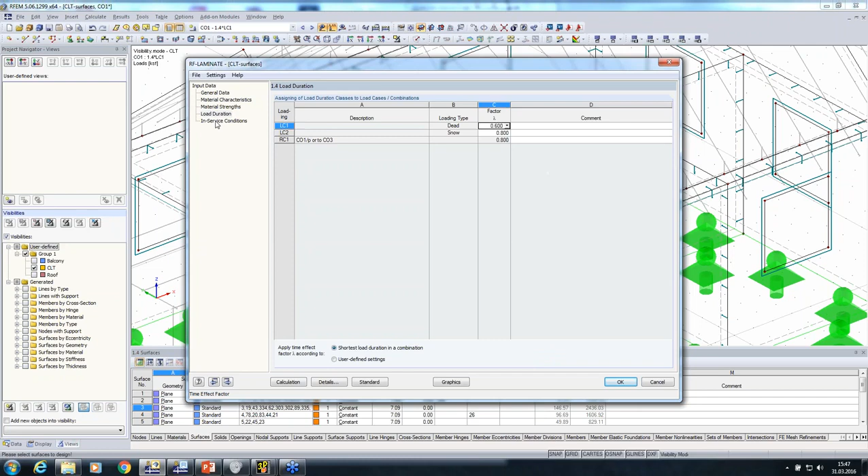As I said, there is a special webinar where it's explained more detailed. It's probably not possible to create the CLT panels, I don't know, 8 meters long. In practice you would segment it into several pieces. I will not do that right here because we will run out of time in this case.

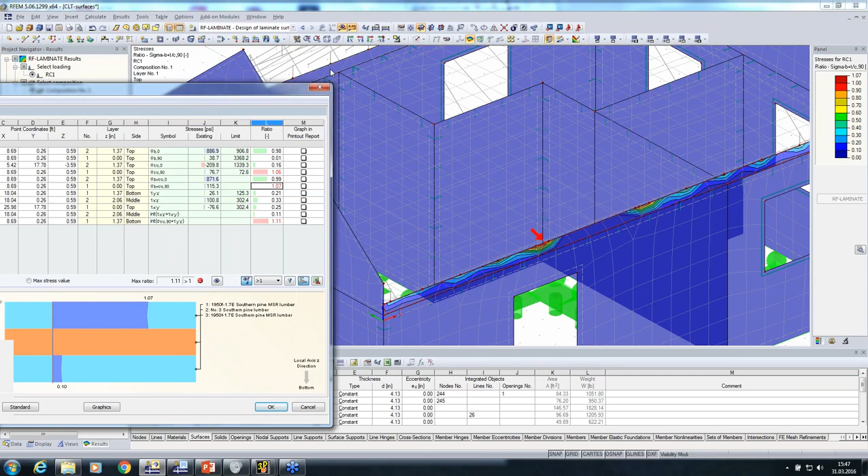Okay, and then I will calculate those panels and have a look what it did. So I got a little bit overloading, probably because of the snow. It's only, you know, on this little edges right here, so that's probably not a real problem. It's where I get the force from the rafters. That's probably something I could weigh out.

And if I look for the, let's say, for the floor, that's a pretty good picture where you can see that I get bending loading on the panel, and here I get the negative bending loading because of the wall that's underneath the panel. So that's all good.

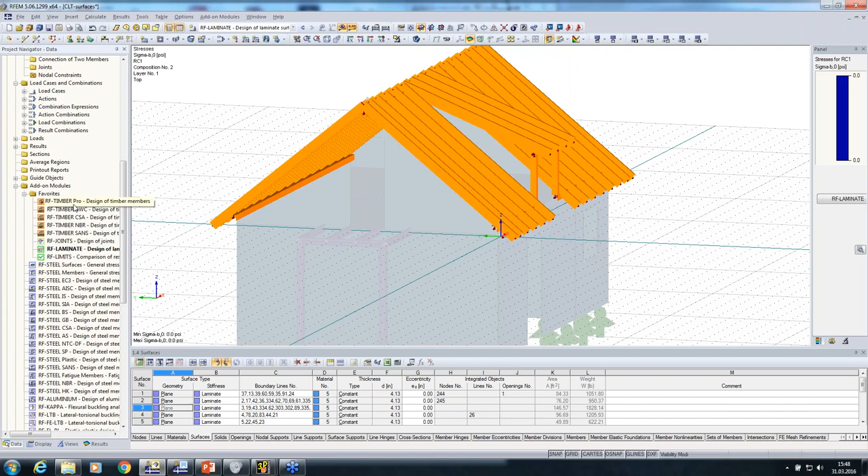Now, as a last step, what I'm showing you, I will make the design according to the American standard for the roof. Because there's a new feature that was implemented by my colleague Gerhard Rehm, and I just want to show you

how nice it works. I also choose this combination here, and because of that I will also use the same load and resistance factor design.

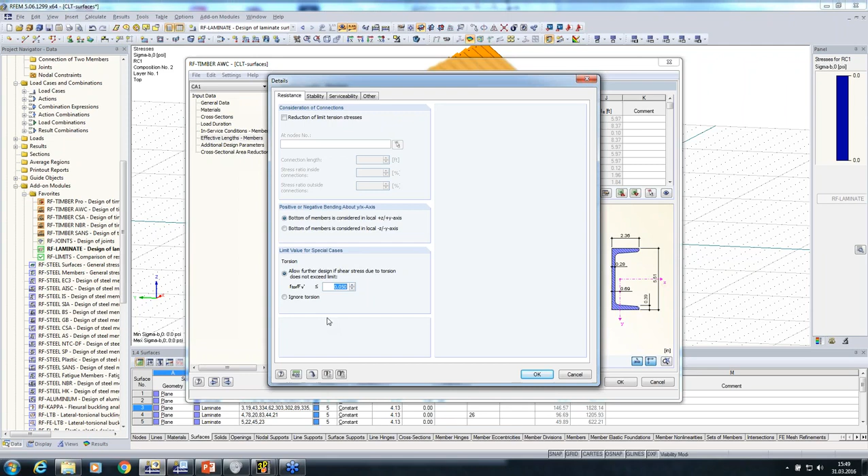In here I would disable the stability verifications. As in the American standard, torsional design is not regulated, and even on such a small position, because of the 3D design, you will get problems with small torsion, which is not really a problem, but it cannot be calculated. For that you can either have a ratio here or define a ratio from what you want to disregard or what you want to regard, or you can completely ignore torsion.

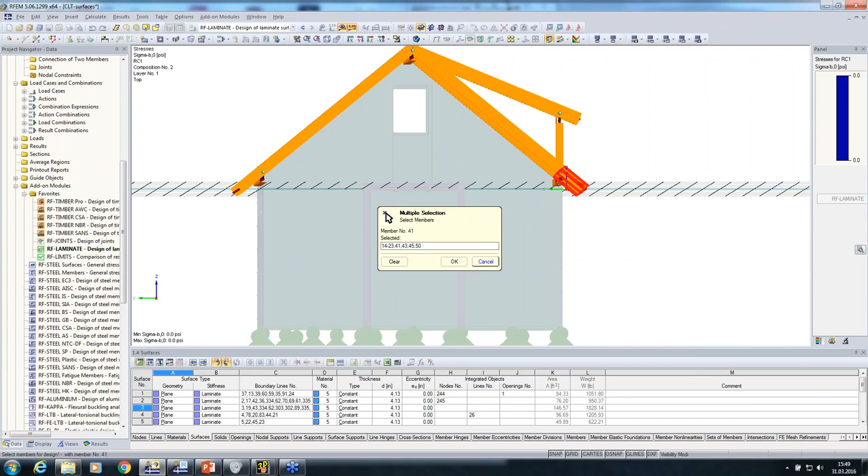What I was talking about was the cross-sectional area reduction for the bird's mouth, or for the notches that you have in the rafters here. Therefore, I choose the rafters on the end, the information about the orientation of the rafters. Okay, so...

I will make the notch on the member end, and the distance from the member end I will keep approximately half a foot, and the depth of the notch I would take also half an inch. Now when I calculate it, I have regarded that little notch.

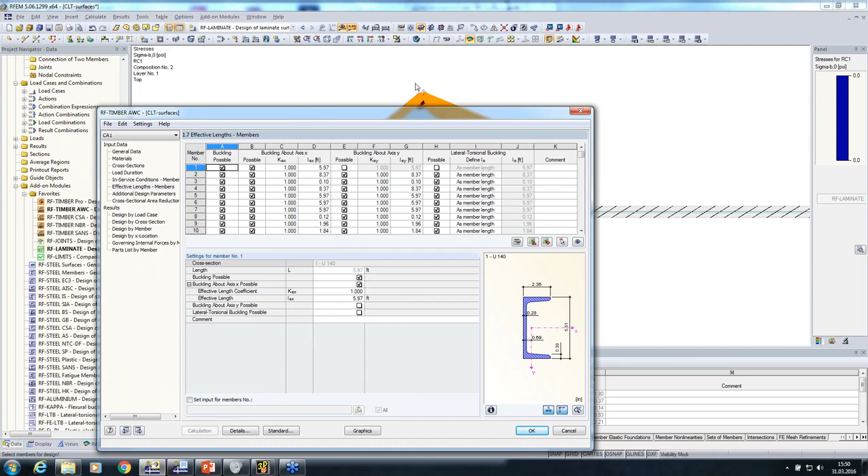Okay, I still have got a big stability problem around this side. I probably took the wrong approach - I just did it for one member. I need to do it for all members. So if I switch that off for all, I will do it completely right here.

And have a look how the stress analysis of this is. Okay, I got still some problem on the dormer here. We don't have time to look for that so detailed right now, but the design of it is more or less successful. There was a little problem I could not find out right now.

So from my side, that's all, and I would give the word to Gerlind, or if Christian wanted to add something. I've seen there a lot of questions occurred, and Christian and Amy are working on that. So maybe I give the word to everybody else.